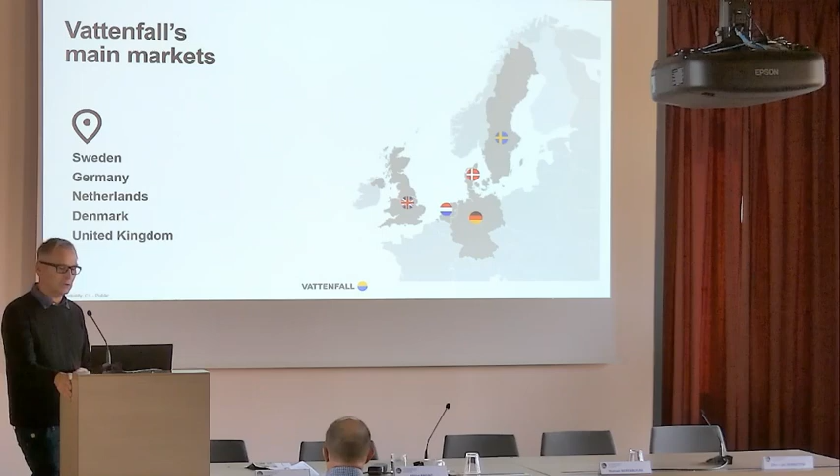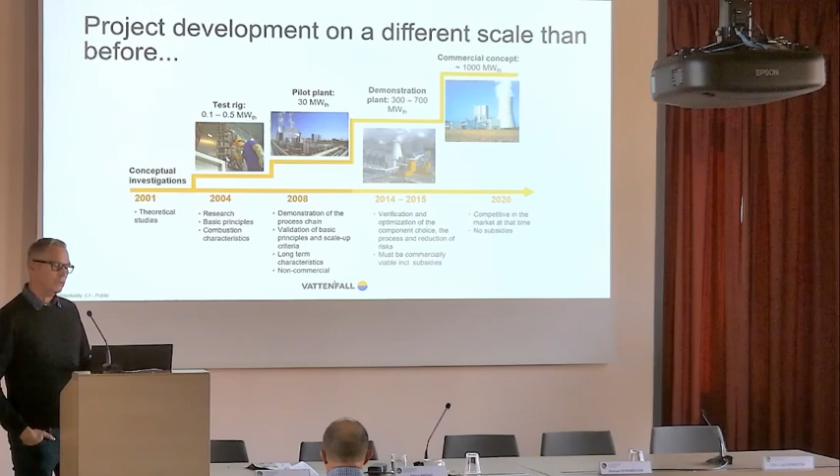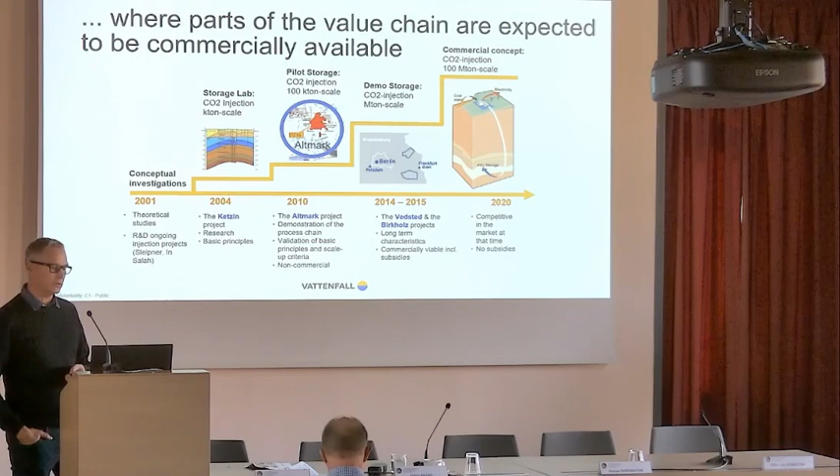So what we are doing now is definitely on a different scale than we did in the past. And the same applies to storage. At that time we were engaged in the full chain, working on CO2 capture, the transport part, and also on the storage part. This is not the case anymore.

Vattenfall has a commitment toward net zero. We have reduced our emission intensity since 2017 by 49%, and of course a lot of that is due to the divestment in fossil fuel power generation in Germany and other countries. We have a target for our own emissions reduction to be in alignment with the 1.5 trajectory and to be net zero by 2040.

Here is a map of our generation, which is wind, biomass, hydro, gas, nuclear, some coal still, solar, and district heating. And what is relevant for my talk today is biomass and district heating, where we have operations in Sweden, Germany, and the Netherlands.

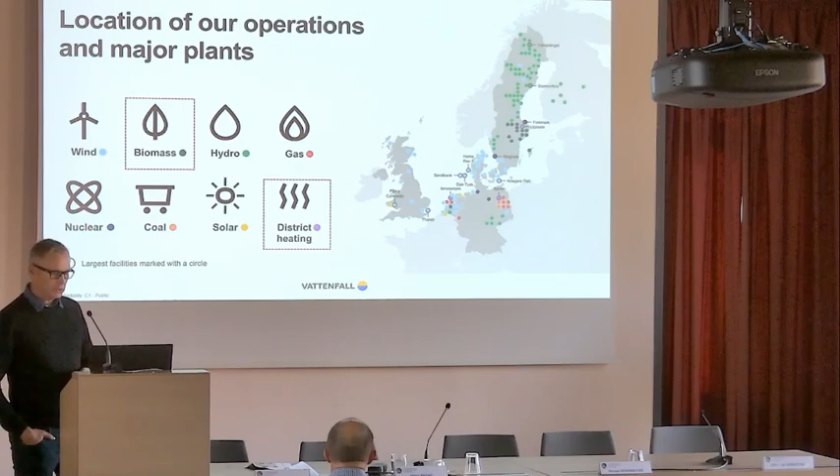We have two ongoing projects. One is CCS and one is CCU. So the one on CCS is in a combined heat and power plant in Jordbro, which is very close to Stockholm. And we have a CCU project in Uppsala, which is north of Stockholm, where this CO2 is intended to be used for aviation fuels in a project partly funded by the Innovation Fund named HySkies.

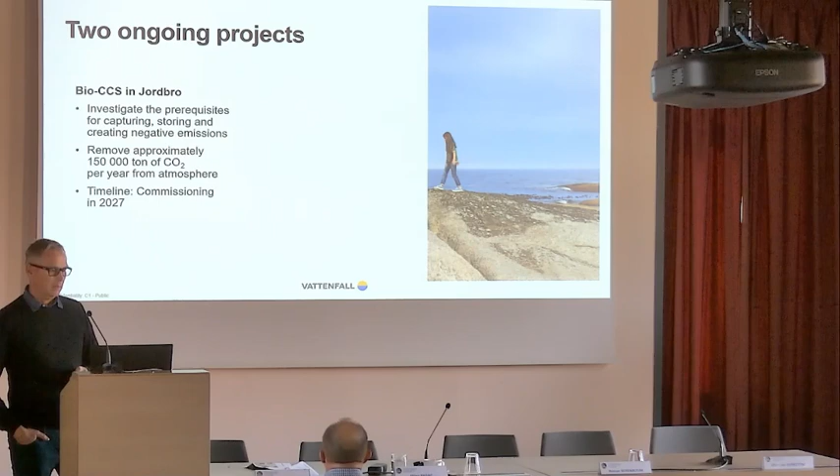But I will not talk about the CCU project, now more on the Jordbro project, where the target is to remove about 150,000 tons of CO2 per year and to have start of operation in 2027. But this is then dependent on state aid.

The Swedish state has given the task to the Swedish Energy Agency to prepare a support scheme for Bio-CCS through a reverse auctioning process, where the state will cover the cost for the full chain from capture, transport, and storage for a binding period of 15 years.

The first stage aims to be storing 2 million tons per year from 2030, and that should then come from 3 to 5 plants. And the first auction is to be announced this year with approximately 600,000 tons CO2 storage annually from 2026, as it says here, but there has been a delay and we consider it now to be 2027. But since we haven't seen the final call yet, we don't know the details, but we are working in our project towards 2027.

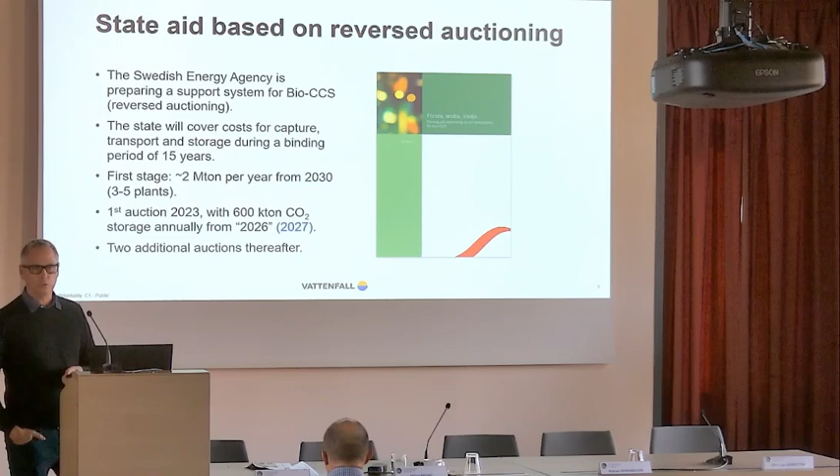And after the first auction, there will be two more auctions later on. So the power plant, you see the location here, south of Stockholm, and we are aiming for a port named Norvik, which is also in the Stockholm area.

The plant is 70 megawatt, and we have a fuel from recycled wood chip. We have operating hours of 6,500 hours per year, and lower during summertime. And for our project, we want to buy everything on commercial conditions. So for the capture, it will be a turnkey solution, which we can buy on the market today, and that as well goes with the transport part and the storage part.

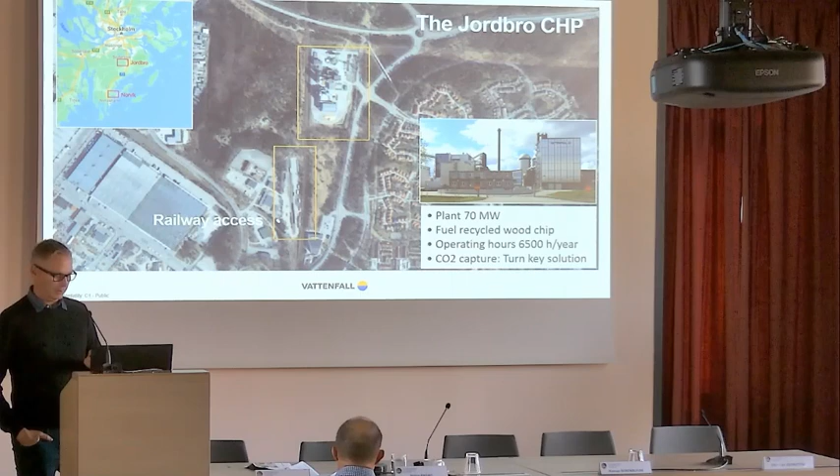And that is, as you all know, an emerging market, but we think it can be done. So the transport part, forgot to say that on this slide, but we have a railway connection very close to the power plant, so we foresee that we can handle the transport to the port by railway.

And by doing that, we want to use what is named as a block train setup, where you have a number of wagons or cars with cryogenic tanks that can be set up on a track and then be used as an intermediate storage. And when the train is filled, the operator of the train will come and get the cargoes, the wagons, and transport them to the port, and by doing that, leave another set of wagons at the site.

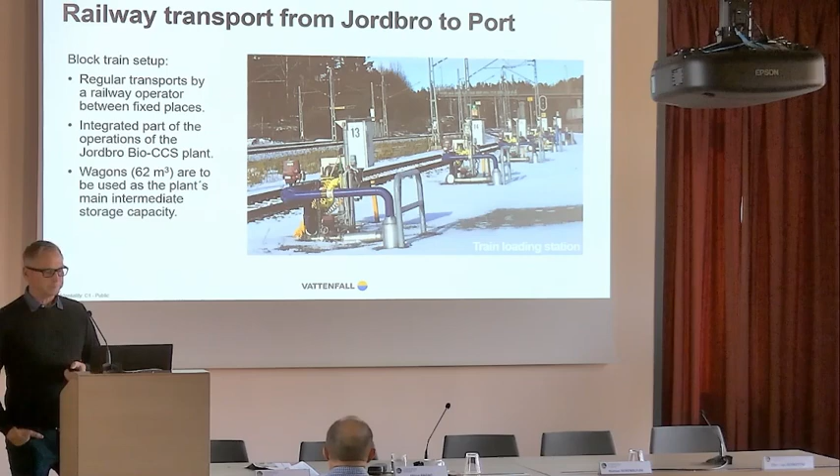We will not fully rely on that, but we don't need that large of intermediate storage capacity at the plant site by this setup. So the distance to the hub is about 35 kilometers, so it's fairly close. So this is our main option today, but as soon as you have the CO2 in cryogenic tanks, of course, it's also possible to take the train somewhere else.

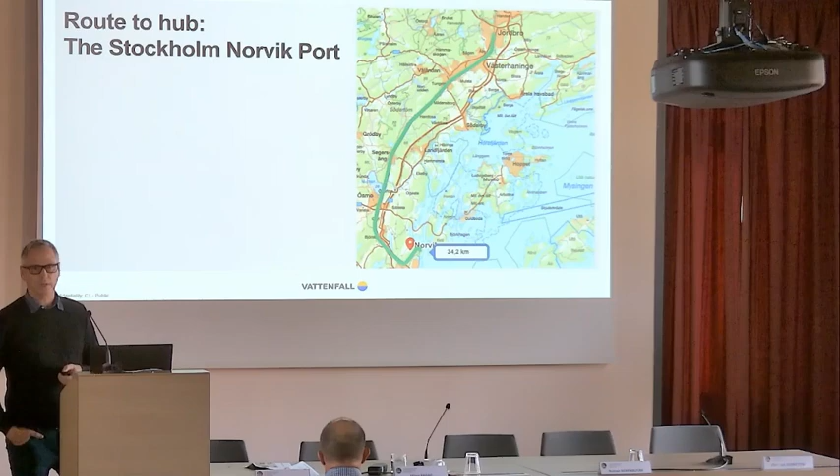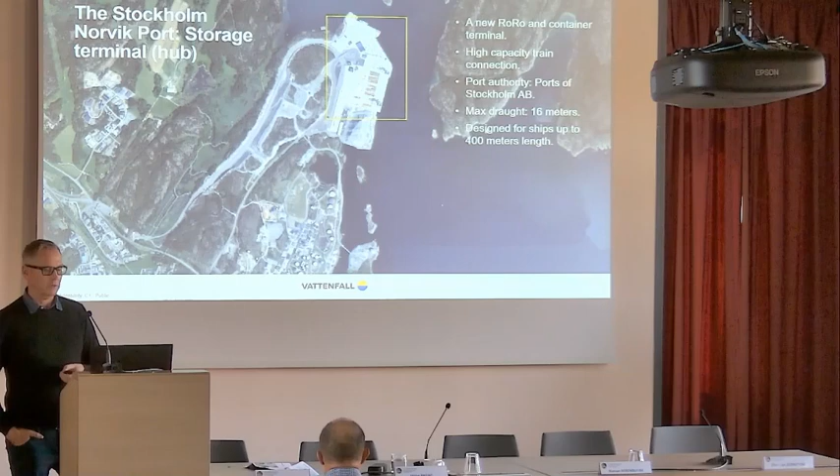But this port has favorable conditions. It's fairly new. There is a new roll-on, roll-off terminal, and it has a high capacity train connection. It's operated by Ports of Stockholm, which has several ports in the region. It has good draught conditions with about 16 meters and can take ships up to 400 meters length.

So the intention here is to build a new purpose-built quay for CO2 transport and the installation that is needed for that. The space is there. So there has been an initial study that points out it's possible to have CO2 volumes handled in the port, about 500,000 tons per year in 2026-27, and to increase that into megaton scale in 2035.

And it has an advantageous location compared to other ports in the region, very close to open sea. This is now being developed in a collaborative project, NICE, which is owned by Ports of Stockholm, to realize Norvik as a storage terminal for captured CO2 from this region.

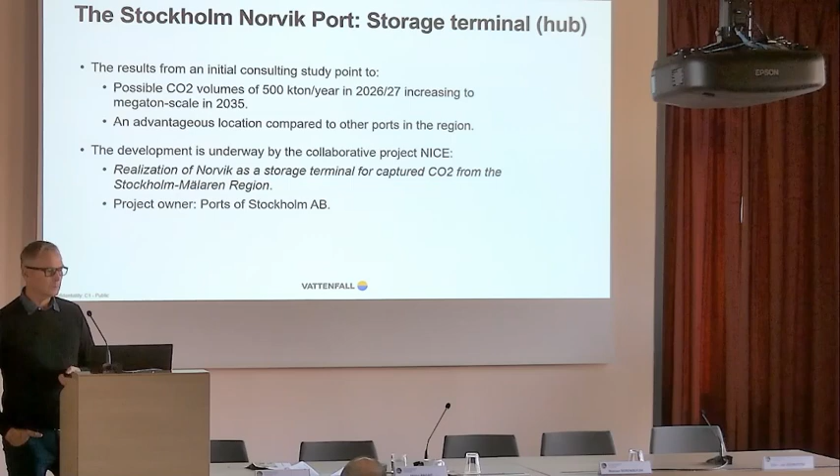So to conclude, not only Vattenfall, by the announcement by the Swedish Energy Agency about the reversed auction, there has been a very large interest in Sweden to develop Bio-CCS projects. So we foresee, of course, a competition for the available funds. But we believe that we have a project with good conditions for implementation to create negative emissions.

And we believe also that there are actors that can offer the services that we ask for, but as you all know, the decision-making processes of these actors need to coincide in time so that all services can be put into use at the same time. That is around 2027. Thank you.